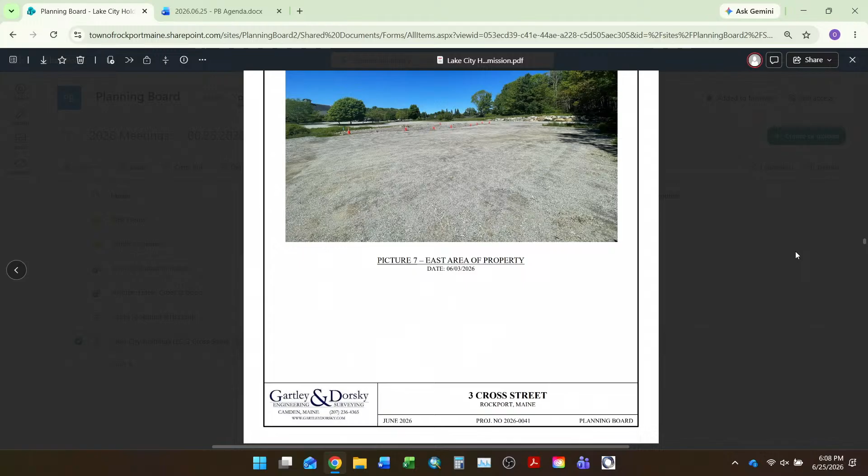It's serviced by public water and sewer, and we're bringing underground power in from a pole off of Cross Street. The water will be both domestic water and sprinkler, and both buildings will be sprinkled. We're providing 36 parking spaces for 24 units, which is 1.5 spaces per unit.

Based on the Institute of Transportation Engineers trip generation manual, each unit is expected to generate somewhere between 5 and 7 trips per day, and a trip is both in and out. So that's somewhere between 120 and 168 trips. Peak hour is anticipated to be between 0.5 and 0.7 trips per unit. For residential, peak hour is typically the PM peak, sometime in the afternoon, anticipated to be between 12 and 17 trips in the peak hour. For reference, DOT doesn't require a traffic study until you reach 100 trips in the peak hour, so it's pretty minimal.

Otherwise, we've added considerable drainage. We've got a lot of grading shown on the site, drainage around the backside, and foundation drains. Everything to the southeast is an existing field that's going to remain, and there's some wetlands down in there. That's where the drainage goes now, and that's where it's going to continue to go. We're collecting a lot of that and discharging it to a stone apron.

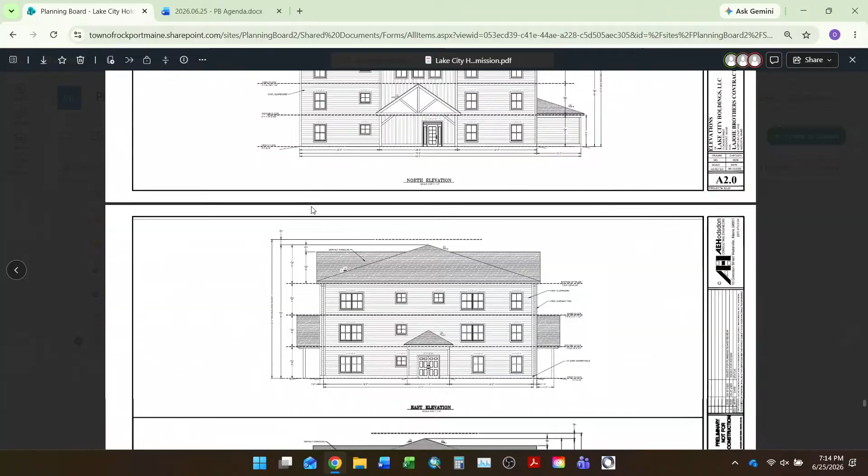I don't know if you can turn to that on the screen so we can see the overall landscape plan, I think it's the last page or two of the document, that one. So what is being proposed regarding compliance with our ordinance for landscape here? I see landscape, but what is it you have to do here? There's some kind of parking shielding requirement or something. We've got a lot of landscaping in that island that's already there, and perimeter landscaping, so I think most of our focus has been more on providing some vegetation and buffering at Cross Street, and beautification of the front of the building.

So there's not really any work happening near the wetlands, that's just to document what's there? Yeah, we're not changing that down there. There's some work happening in the back, but really that's not our concern.

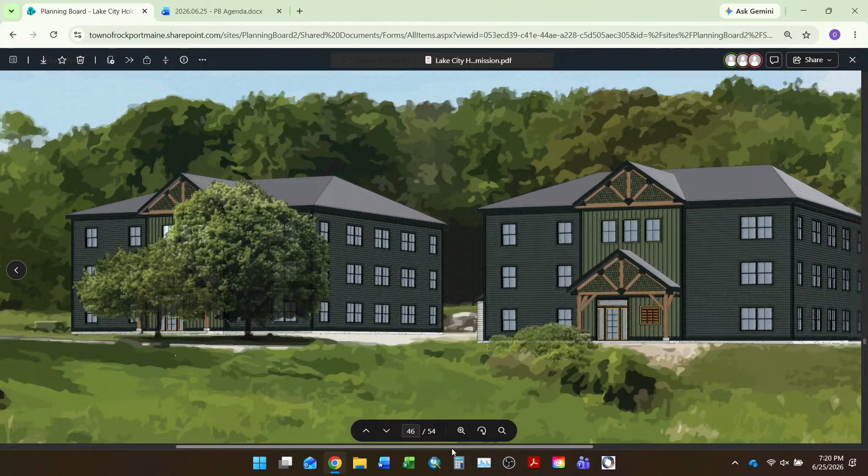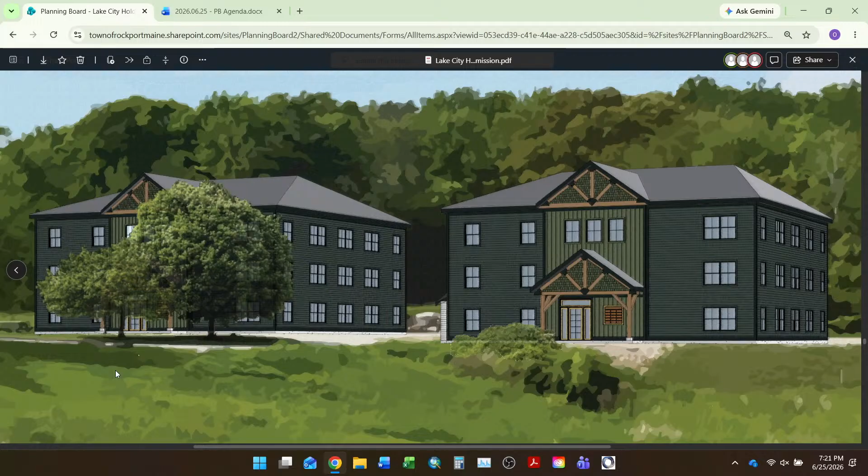What we've adjusted architecturally is we've done the exposed timber look, which mirrors the church that it's facing, as opposed to what we had before, which was a flat, simpler design. We feel like this speaks to the cohesiveness of this little corner. We've also moved our siding package away from vinyl to something higher quality where we're going to see that clapboard and board-and-batten finish.

We're also proposing a darker color scheme. We have a couple palettes to choose from, but our goal is to keep this dark to blend in with the tree line behind us.

Did you say what the material was? It's an LP product, a standard color LP product. They have a pretty impressive range of products and colors at this point. All the colors shown here are pulled as samples from the LP product.

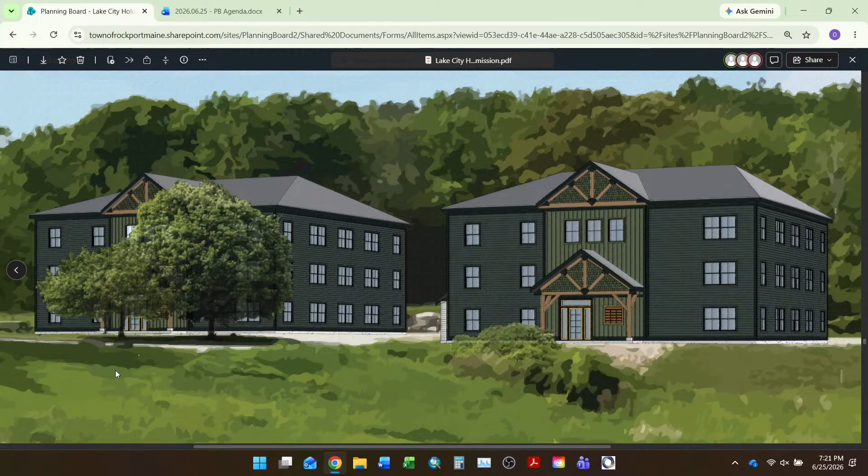Those are the choices you're considering? Yeah, there's a couple palettes you can see. Maybe not that middle one, but I like the blue we have up there. Regardless, the goal is to keep the color scheme dark and blend with the forest behind.

So this isn't trying to stand out, this is trying to recede. Yes, correct. What is the material?

It's LP - Louisiana Pacific. It's a brand, not wood. It's lap siding, like clapboards, but not wood, and not plastic vinyl either. Life expectancy is longer than wood, and it's heavier than wood.

Sorry, I'm just reading through this. Okay, so it does not exhibit a franchise style with more than one building - there should be an overall design concept. These buildings are identical.

No drive-throughs, there's no renovation involved. Roofs shall not be long and monotonous - I wouldn't say that these are. No one disagrees.

Let's see, flat and mansard roofs - these are neither flat nor mansard. These are hip roofs.

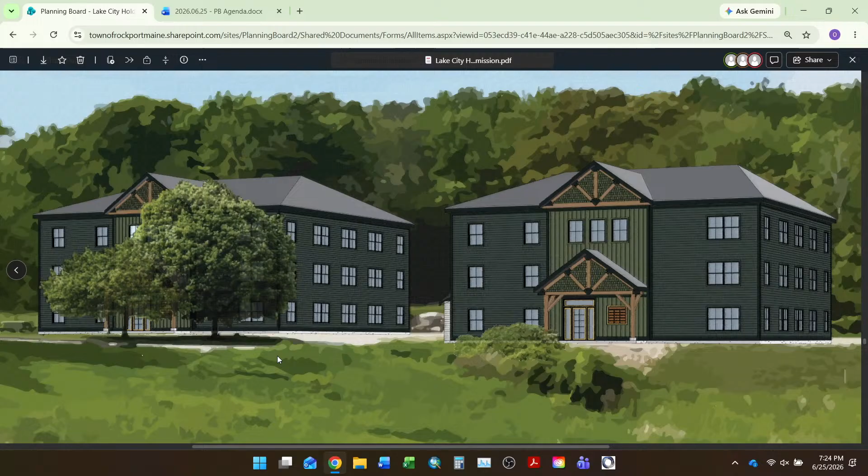So, parking lot design should follow the ordinance for minimums. No auto sales here, no boat sales and storage. I assume you know, boat storage here, right? No, it's just the parking spaces for people's cars.

That's chapter 1,000. Any other items in chapter 1,000 that anyone would like to discuss? Hearing none, would anyone like to put forth a motion to accept the application meets the requirements of the detailed standards of performance, chapter 1,000?

So moved. I heard that simultaneously, I'm just going to go left to right. Tom, motion; Jan, second. Any further discussion? All those in favor? Thank you.

Now tracing back to section 1305, site plan review. This is basically an overall check that it meets those detailed requirements and the application requirements. So 1305 is performance standards: preserve and enhance the landscape.

So to define, soften, and screen the appearance of off-street parking areas, we discussed that and approved. Soils and erosion control, we discussed that and approved. Access, we reviewed in section 803 and 808. Parking, we reviewed. Surface water drainage, we also reviewed.

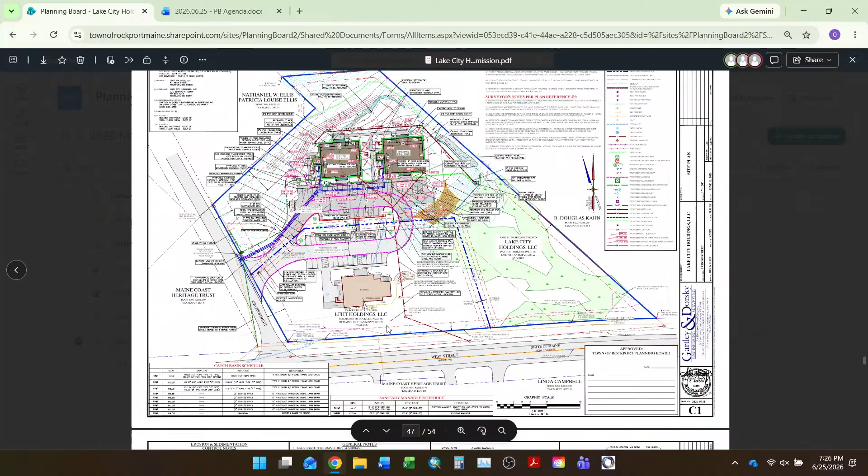Existing utilities, we have letters from Maine Water and the sewer system that there's adequate supply and volume. Special features of development, storage, we determined there wasn't. Exterior lighting, we determined was compliant. Emergency vehicles, we said okay to that based on the letter.

Municipal services will not have an adverse impact. Water, air quality, not really any impact. Water supply meets their needs, and that's it for 1305.

Anyone like to discuss anything more about 1305? Is there a motion to accept the application meets the requirements for section 1305? So moved. Okay, thank you, Jan. Is there a second? Is there a second to that motion? Peter, thank you. Any further discussion?

Did we talk about interior sidewalk connectivity at all? Did we know? So I assume there's going to be just sidewalk from the parking to the buildings, or is there going to be anything else special? No, right now, that's what we're showing.

Are there going to be any common areas, like play areas or things like that? On the landscape plan, we show that — the area up behind the building and also the area between Cross Street and Building 1. Yeah, that shows it better. Oh, okay. And that shows sort of internal sidewalks from the back to the front.

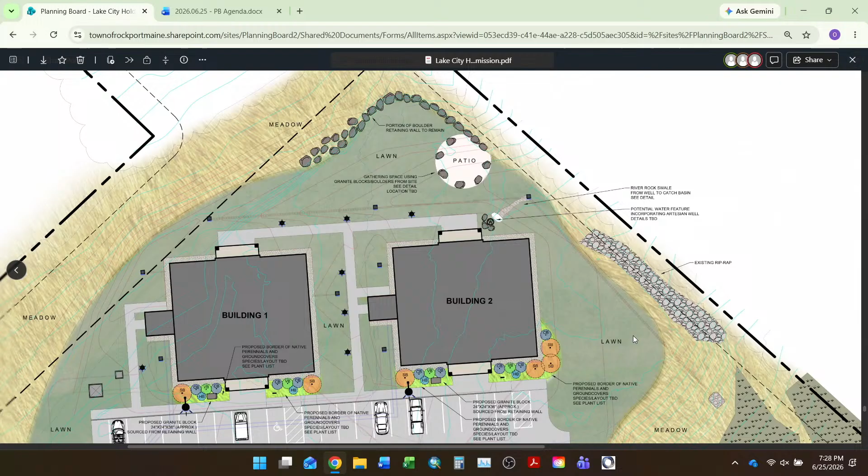Got it. So if in the future, when there is a path along West Street, and hopefully there is, the way that residents here would get to it would be to walk out their driveway down to Cross Street. I mean, depending on what the final design is, there's multiple ways, and there's potential for coordination between the front property that's there and this property. I think there's multiple ways to potentially create a way to get to it. Once that design starts to develop, it'll be easier to figure out how best to connect to it.

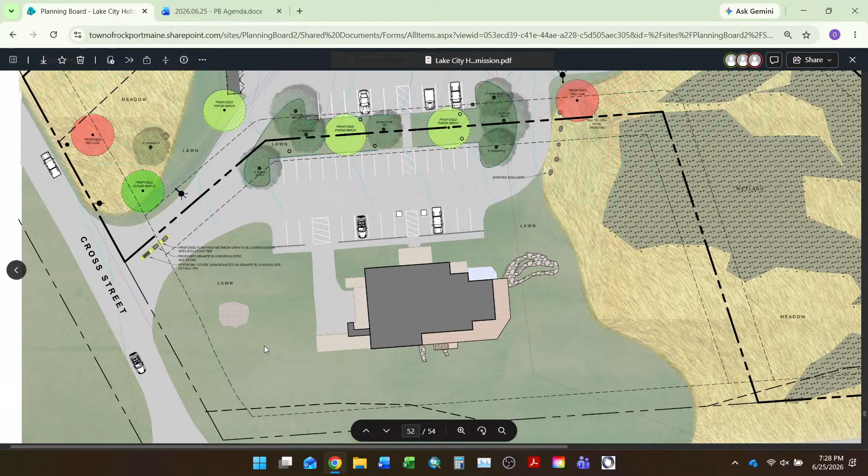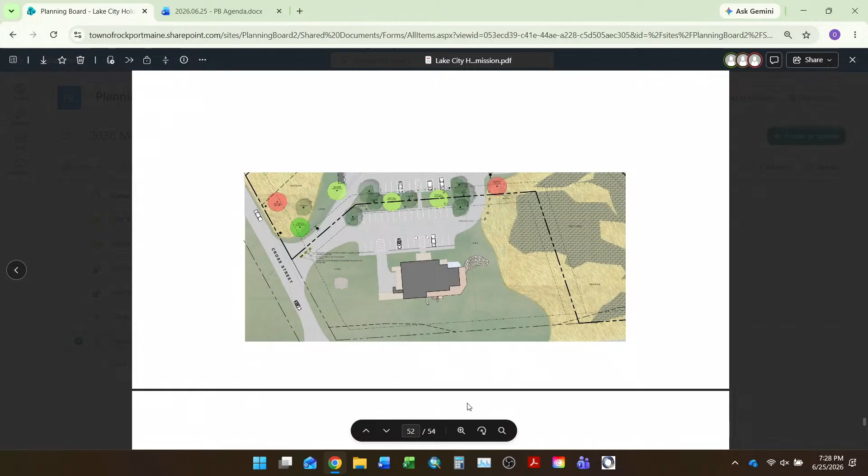Is there even a potential to go the other way, so if people wanted to walk to the village through the wetlands area? Not easily — it would require permitting, and if there's another way to do it, it would be easier than going down through there. There's quite an elevation difference from Route 90 down in that southeast corner, down to that field where it's wet — probably easily a 10-foot elevation change down there. So the further you get to that southeast corner, the harder it is to get back up to Route 90.

Is this going to be attractive to 10-year-old boys? That field down there, yeah. Probably, in the woods. Yeah, I think in the winter you'd see them sliding down that hill into the field. I'm thinking it's easier to get to school than going out the long way — they've got to be more fun. Yeah, and a lot more ticks too.

Question from Linda coming up. Okay, so Will's going to remember this — this is going back to MRC, right? And when the planning board said you have to have a sidewalk going from MRC out to Route 90, I'm just curious, if this is a subdivision, does the ordinance say now that there are sidewalks that have to be along the section of road that's owned, or am I just dreaming this? I'm just suggesting maybe someday a sidewalk or something down Cross Street — if not a sidewalk, at least something for pedestrians — so that there'd be something on this piece of property that would be a sidewalk, so that the 10-year-old boys know they're not to ride in the road.

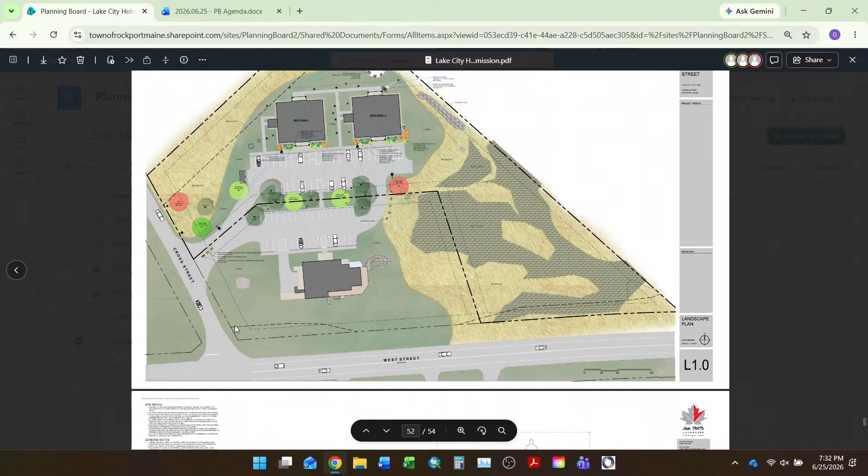Okay, so we had a motion and a second for this section, where are we, 1305? Yes, 1305. We had a motion and a second, this was part of the further discussion. Any further discussion? Okay, all those in favor?

Okay, thank you. Orion, did I miss anything in your list of chapters? Were there any conditions that we had, Orion? Not in this process, no.

Okay, so is there a motion for the project, I'm just going to abbreviate it 3 Cross Street, to state that it meets the land use ordinance as presented?

Any motion? I realize I don't know a name for this place other than 3 Cross Street, I abbreviated it as 3 Cross Street. We have to have a name, don't we? Doesn't every property subdivision require a name? No, this is a site plan review. Is there a second? Yes. Okay, thank you, Jan.

Any further discussion on the application? Hearing none, all those in favor? Okay.

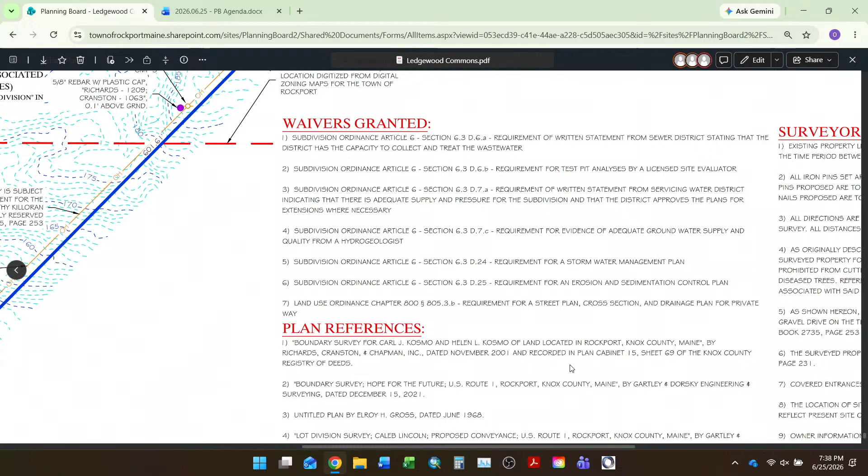I should also ask if there are any comments from the public that we have not received. There was one comment that came in, in the folder, only one received. I'm pulling my email up to see if another one came through. I should also ask, pro forma, are there any conflicts anyone would like to cite? Hearing none. Are there any comments from the public? No. Closing the public comment period, also opening it at 7:38. No other public comment for this one.

Okay, thank you. So let's talk about that public comment first. I don't know the history of the project, but the person writing the letter seemed concerned, and I just don't know how we address those concerns. Did you see that comment? We looked this morning, we didn't see any public comment. This is the comment from Tim Killoran, who's the neighbor behind you, I guess.

Yep, he has the access road that goes to his lot and the other adjoining lot, that we're familiar with. His comment was basically, there's a note there that says edge of gravel extends over property line, possible encroachment. He's concerned that his road encroaches on your parcel. Where are you now? Oh, right here, yeah, he might encroach on us. I don't know if you want to pull up his letter so I'm not inaccurate in what I'm saying, but it's accurate, he's concerned that in the future he will still be allowed to by right use his access road, even though we encroach.

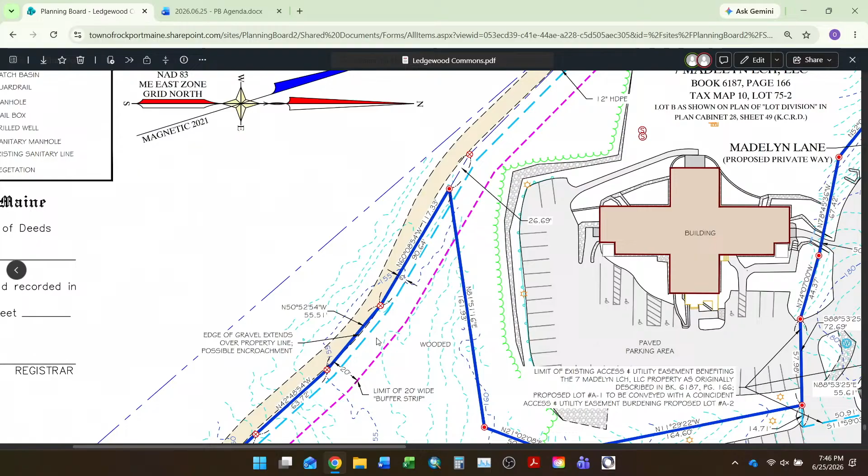Exactly. It might have been that the surveyor in the field was looking at those two pins and said the gravel might spill over here, we don't know, and just put it on the plan. Okay, so your position is you have no intent to do anything near that road, nor are you allowed to do anything within 20 feet of it? Yeah, and if you look down at the notes, the dashed light blue line is a 6-foot wide gravel maintenance and repair easement for the benefit of Timothy Killoran, 6 feet into our property.

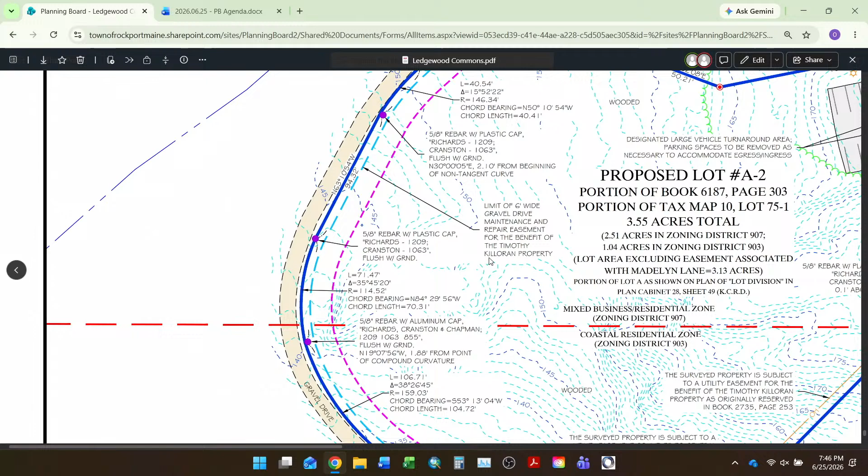Okay, I mean, he's pretty well covered here. Maybe he didn't notice that note. Probably not. So that should be sufficient, and then there is, as mentioned earlier, a 20-foot buffer for us not to do anything from the edge of the property. So it seems like it's belts and suspenders as far as he's concerned. He's pretty well set. I don't think we need to do anything else. So yes, he's not asking for anything in particular other than that we have careful consideration, and I think we've done that.

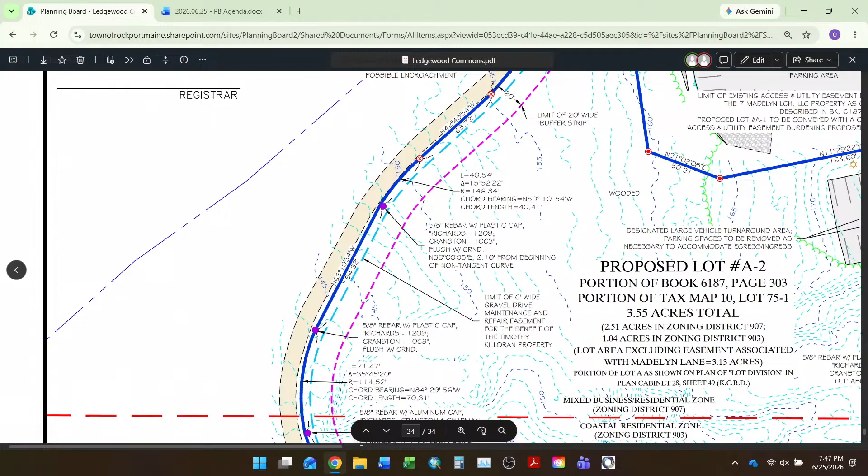Okay, so what do we need to do in regard to this application? Orion, can you zoom in again on those waivers? Pull this thing up too. Can you read that or zoom in more? Yeah, that's good. Okay.

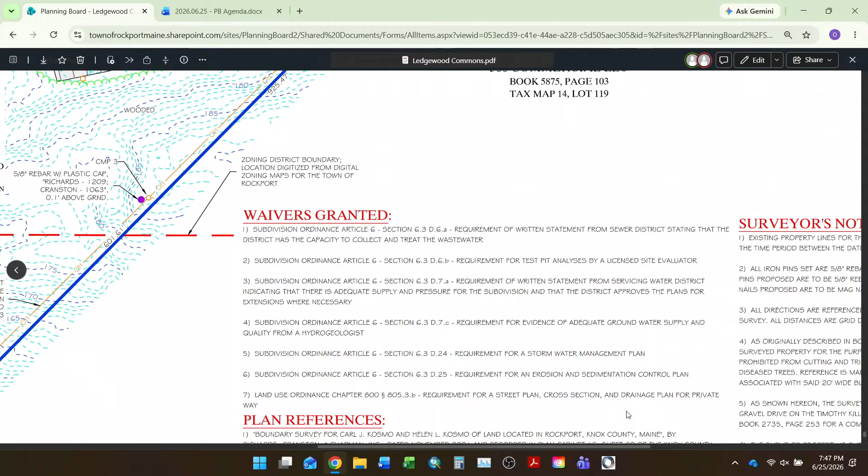Everyone here tonight was at the pre-application review, right? Yeah, those were presented last time. It's a repeat, in a philosophical way, but you presented them. Your response was, well, we can't give you the waiver now, you have to put it on the plan. No, but you addressed that, nothing new, right? No, nothing new, these were all discussed. I would say, perhaps, the only minor difference is the final one about the road.

So we discussed the status of the road being a private way. This private way ordinance talked about having a whole separate plan, but our engineers spoke with the planning office and said we can just put it all in this plan and identify it as a private way. It's all built, will be. Yep, so that's what we did. Okay, and one of the things you addressed in depth is that anything in that back parcel would have to come before us or something else. Absolutely, yep.

Okay, I'm reviewing the minor subdivision that you've marked up, for completeness. Okay, so submissions start with 6.3. And this is the current ordinance, I think. Is it the current ordinance? No, this is the 2025 one. Right, so not June 26.

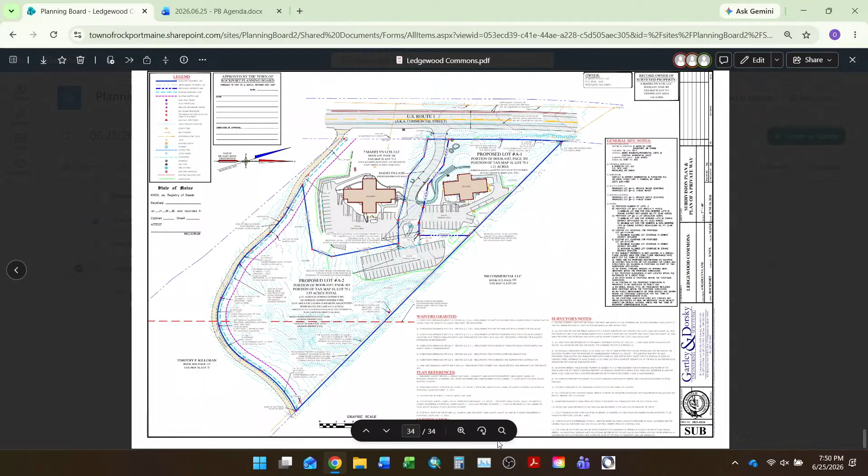So mark that one, 6B. Well, I think it's 6A and B. 6A and B? 6A and 6B. Okay, and 7A.

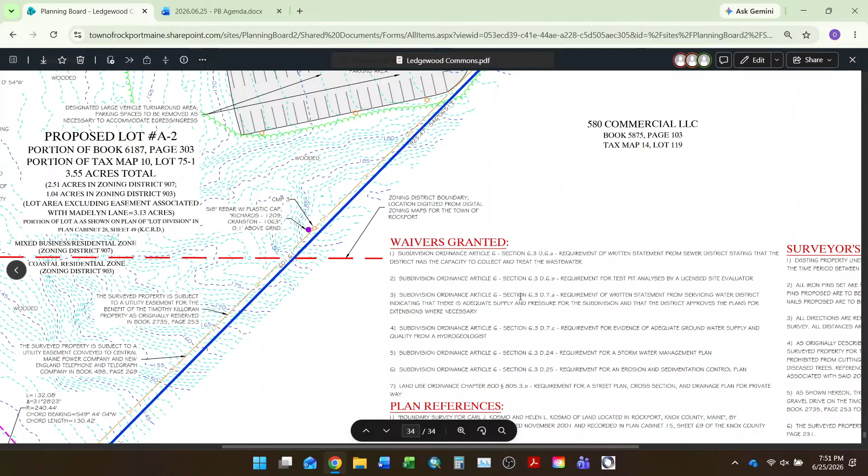Date, North Arrow, graphic scale, names and addresses, pre-existing conditions of mines, number of acres, yes. Locations of rivers, streams and ponds, no. Contour lines, yes. Zoning district shown. Sewers, water mains are shown. Widths of streets and highways shown. Locations of improvements, open space preserved is not being done. Dedicated to the public, not doing it. Flood prone, not applicable. Hydrogeologic assessment, nope. Vehicular traffic, nothing adding to it. 40 or more parking spaces, there are none.

It carries the previous permit for access. Stormwater management plan, where are you? I'm on 24. Okay, 24, stormwater management plan is the next waiver requested. 25 is a waiver requested for sedimentation control requirement. This is not high-value wildlife habitat.

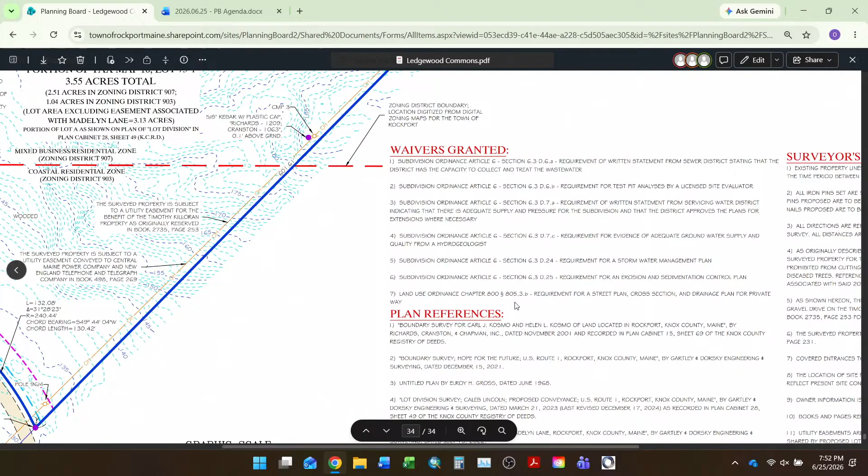What is the source of that information if this is wildlife? Gartley & Dorsky. Is that something we have on our map? High-value wildlife habitat? We have it in our comp plan, we have a map on it, but it's the same thing that Gartley & Dorsky would pull. It's from the state. Inland fisheries.

What about black squirrels? Is that high-value wildlife? Black squirrels? Off the top of my head, I don't know. I have one in my yard. Nobody else knows about them, nobody else has ever seen them. No, woodchucks. It's not a woodchuck. Could be a mink.

Okay, 25, 26, 27 — subdivision is a direct watershed of Great Pond, it isn't.

Roads shall be designed and constructed in conformity with the street design and construction standards contained in this ordinance. Approval of the road layout by the Rockport Road Commissioner or Public Works Director is required.

Public Works Director, what does your comment say? Have you not been successful in getting a response from them? We had to do this two weeks ago, but Ryan, I've chatted with him, he's been very busy, he's seen it, he's fine with it.

Do we need a condition? You can put a condition if y'all are comfortable with it, but I can have something in writing from him tomorrow to add to the file. He has seen it, I've had a meeting with him, he is fine with it.

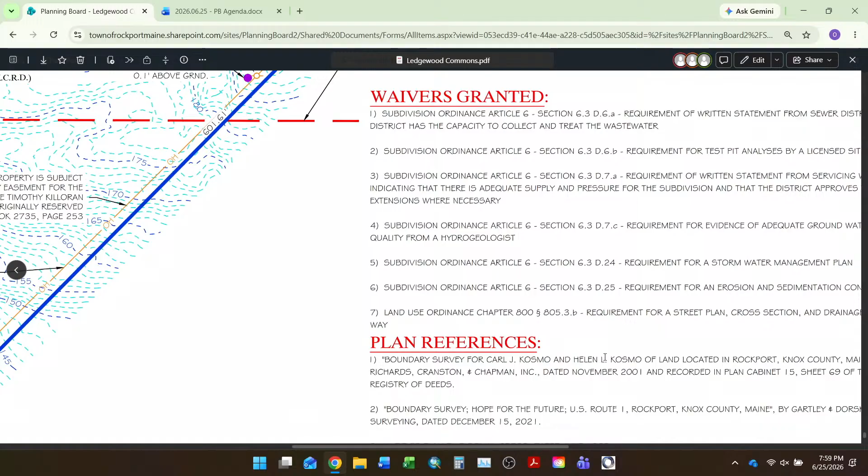So moved. Thank you, and Peter, you're seconding it. Any further discussion? All those in favor? Four to zero. Perfect, thank you. Thanks, yep, and that's that.

So, moving on to our other business, there are a couple items I'd like to put on there. One is that Renetta asked a question: anybody want a printed land use ordinance? Do y'all want a printed copy from the office? Yes, I'll pick it up tomorrow.

Jan, would you like one? Peter? I think it hasn't changed drastically, right? It hasn't changed drastically, yeah. I'll print out a few pages tomorrow, for sure. If you wanna wait a little while it'll take a while to wrangle them into effect. Is it effective now? Yes, it is.

We have it online, right? It's online, yeah, but we need that letter from Mike. I'll get that tomorrow. Okay, they can cancel mine. Do you have one? I'll just use the online version, I'll throw away the other one. I just don't wanna be confused or use only one version, so I'll download a copy of it. We're gonna discuss changing it again. Well, of course, you can postpone it.

Also, don't leave before you sign the subdivision. No, we just talked about that. Y'all don't leave, yeah, that's us. Okay then, yeah, you guys can leave, thank you. You can go. Thank you very much. Thanks, guys.